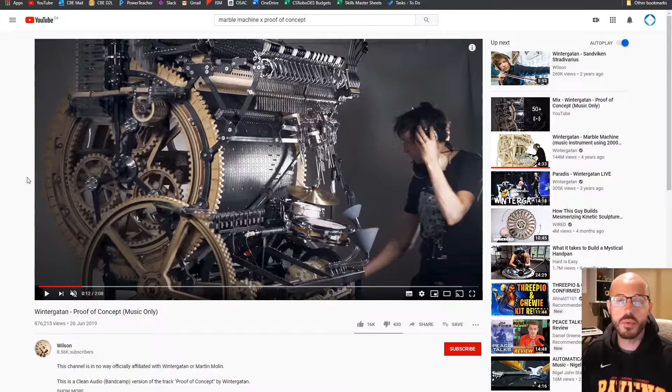So I actually got a part assigned to me a couple weeks ago. It is this part here, which is these tracks as the marbles come out. So they hit the vibraphone, they go into this funnel, they go through a tube, and then they come out here, and then they roll together and end up merging with all the other marbles from various parts of the machine back into the loop that takes them up to the top.

So this part, as well as this bracket, was my assignment. I actually had the original models from Martin, so it was just kind of tidying that up. And then in terms of modeling it on the actual machine, this is a piece of plywood, but it's kind of warped and bent. So I just kind of had to do a quick and dirty bend to this whole thing to make sure that it lined up with the other parts.

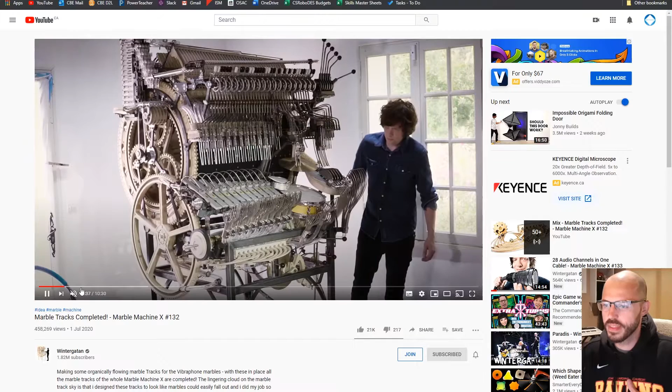Not too hard. I'm not going to show you that, because as soon as I submitted it, basically the next day, Martin uploaded this video that I have open here. And it's basically just, hey, I'm chopping off this piece and here's the replacement. So my task continues. And so this is the new part, the new version. Very beautiful. Like, look at these marbles rolling. And they kind of speed up as they go in. Very interesting part. So I have to remodel this.

Luckily, I get to keep this bracket, but I'll still show you how that came together. Then we've got these parts here, which is actually fairly straightforward because I have the original files from Martin. There's another bracket under here that I have to model. That's a big chunk of the work, and that's what I'm going to focus on today.

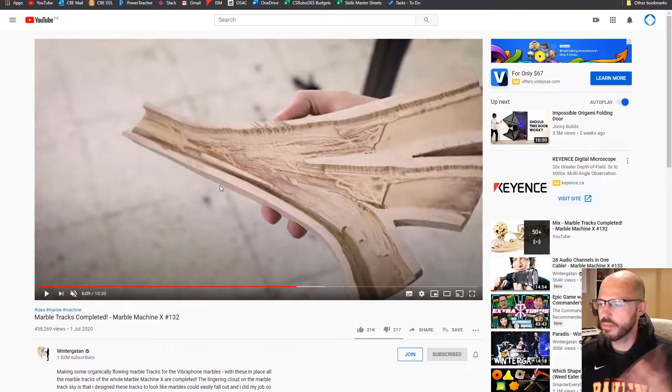And then the last thing that I won't get to today, but maybe in a future video, is this piece here where those tracks come together. And this is not modeled in CAD anywhere. Martin cut this just freehand with everything in place to make it fit. So I'm going to have to approximate this as best I can based on this screenshot basically and the other geometry that I have. But I'll save that for a future video, or I'll just show it to you later.

Now, I have a strong suspicion that I'm going to have to redo this again. No shade to Martin, and I've seen other people talk about this problem. So these are very thin pieces of plywood. And if you watch the video, Martin takes a lot of care to bend them and secure them in just the right way so that he gets this exact kind of motion that he's wanting, where they kind of come out slow and then they speed up as they come around the corner.

Now, as this goes on the road on a world tour, these bits of plywood are going to warp and bend with humidity changes. And so that's going to throw all of that fine calibration out the window. My expectation is that I'm going to be redoing this part at some point, but we'll cross that bridge when we get there. And for now, let's have some fun. I thought it would be an interesting thing for those of you that are learning Fusion 360 to see how I approach this challenge here.

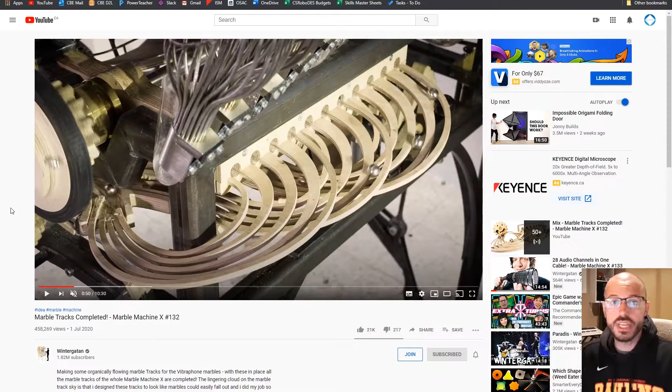So to kick things off, we'll just hop over into Fusion here. This is actually the file from Martin that I got. So you can see here are those curved pieces of plywood. And then what he did, he modeled these in 3D with these curves to fit the actual assembly, and then took the top plane of these and made that into a 2D shape so that they could be cut out on the CNC out of plywood.

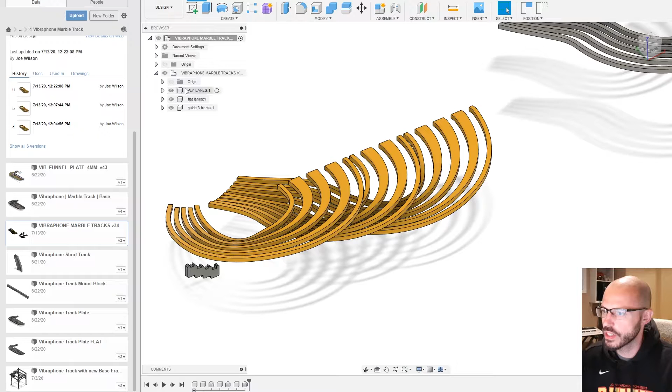So really all I care about are these things, which it looks like, okay, so they're a separate component. So I think what I'm going to do here is I'm just going to export this component. I'll save a copy as. I'll just call this VibTracksREDO. And now I've opened that up.

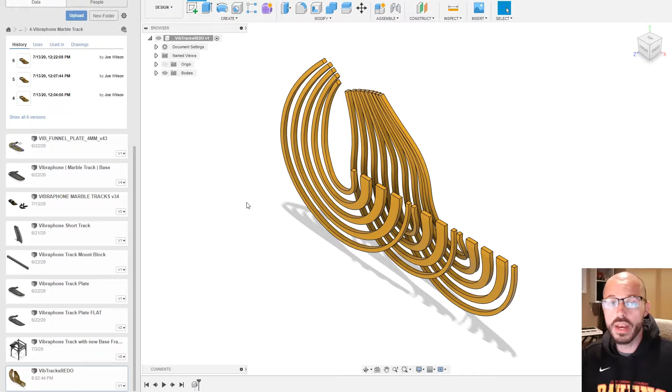So one thing that we've talked about a lot in Fusion 360 is this idea of rule 1 of creating empty assemblies or empty components and building each individual part as its own component. For this de-featured version of the Marble Machine X, part of the CAD guidelines, the standards that our team has put together, is kind of the opposite of that. Anything that is its own part, so in this case, these tracks along with that bracket that they attach to and the thing that collects them all, that's just going to be a single component made up of just bodies.

So these bodies aren't going to be individual components. So this is a fine place to start, given that I just have these bodies. So that's great. So one thing that we're also doing is trying as best we can to have every part use the same origin. So here is the current version of the base assembly that my marble tracks are a part of. And so they're going to attach right in here.

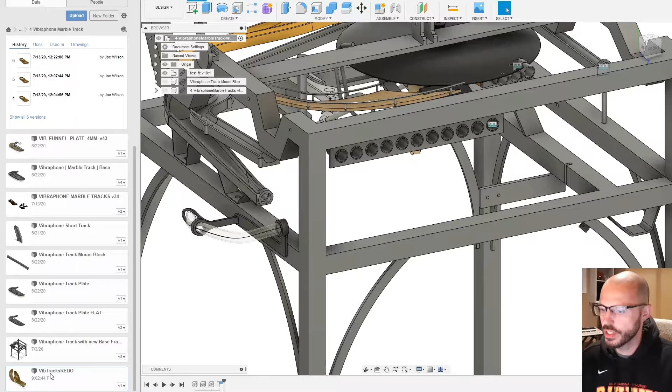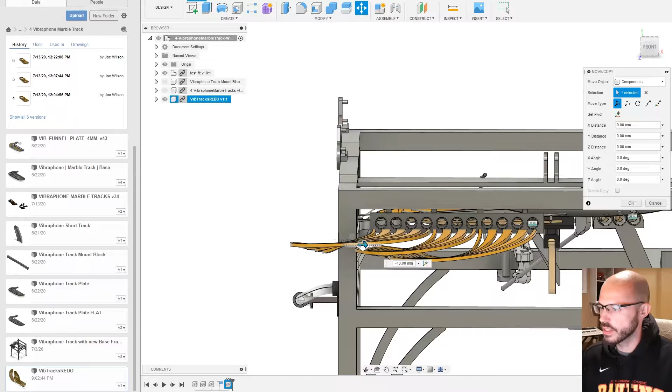So the thing I'm going to do is I'm going to insert this in, try and just kind of roughly line it up and see what's going to need to happen. I'm just placing this really roughly just to kind of get a sense. So when I start the next part of this, I know that this is like at least kind of in the right spot. So when I move this here, we can see the origin for this part, that's this one, is way over here. And what I would like is for this origin to be down here.

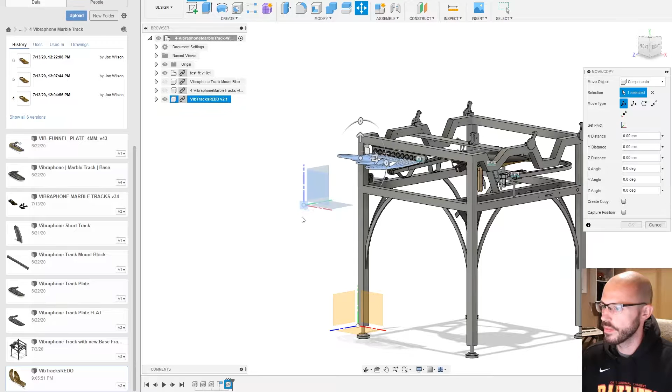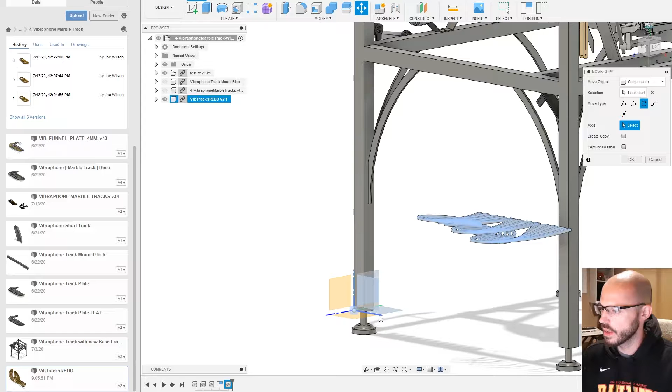So actually what I'm going to do is I'm going to move this whole component. We'll do a point to point, and we'll move that origin down to there. Now, the other thing is that the origin of this is rotated from the origin of this base model. So I should actually rotate this whole component over this axis 90 degrees to get that in line. So that's if the origins are lined up and now the part is not lined up.

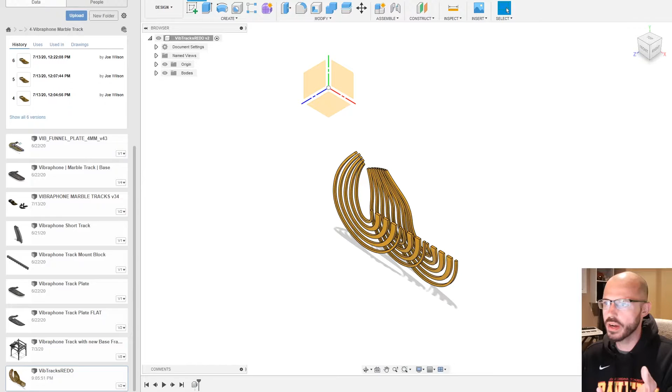So what I'm going to need to do is edit this part so that it is in a different place relative to its own origin. So I could go back and do that in here, but I wouldn't know where to move it. What I can do in here is I can say edit in place, and we'll capture that position. And now I can move bodies. I want to move all of them, and we'll just do free move here. We're just kind of roughly getting it into place. So now I'm moving this relative to its own origin.

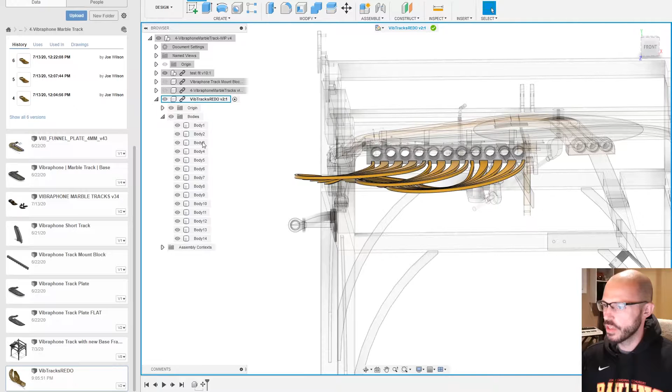This is so that when other people are loading these models into an assembly, they are already going to show up in the right place. And they don't need to track down exactly how they align. So then what I can do is I could check this, finish edit in place, save this, okay.

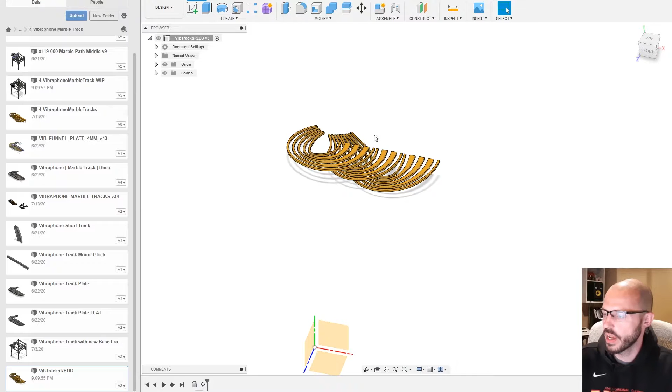And once that's done saving, I'm going to flip back to the other file. And we can see that it's got an out of date warning. So I'm actually just going to close it and open it up again. So now we can see the origin is down there. We've got our part here. And the next step is going to be working on that bracket. And I'm just going to flip to the video and show you exactly what I'm talking about here.

And it's this piece here that is going to take a little bit of work to model, and I'm going to have to make some assumptions, but I'm also going to base some things off of measurements from the actual model as it exists now. I don't think any of the assumptions I'm going to be making are really critical measurements. If I needed to, I could submit a request to Martin to take a measurement off the machine, but I don't think that's important. Unfortunately, I don't have the CAD model for this, which is odd.

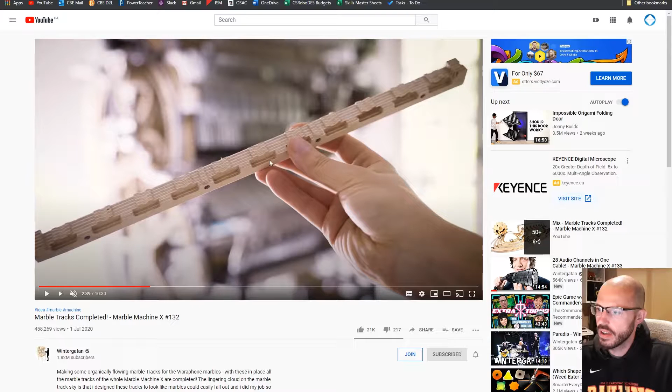So, I mean, it's possible he just did this by hand on his CNC, just because it's just a repetitive geometry. I'm not sure. But what we can do is model this to the best of our ability. So this piece here fits onto the assembly here on this metal bracket. So it's the underside, and then there's a top bracket that I already have from the last time, a top half of this. And so those two together kind of sandwich the track pieces. So you can see there's that part there.

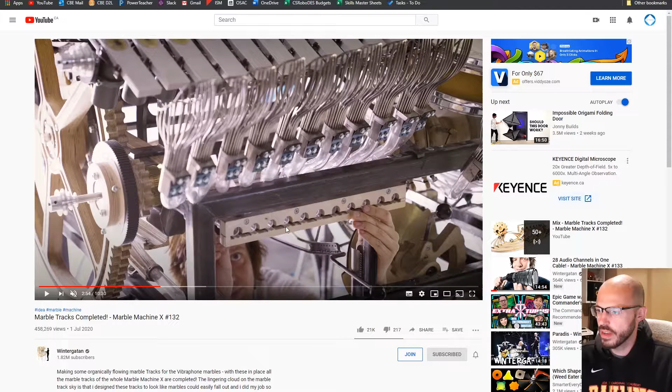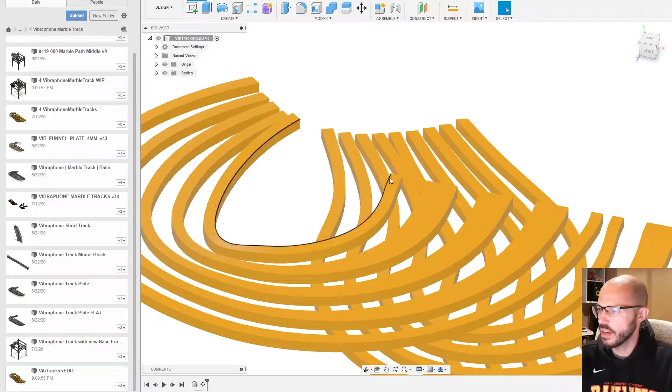So we've got these 11 rails for the marbles as they come out. Although I don't even know if they contact these because the curved rails are above them. These notches in the back are to clear these, and then there's some kind of posts here just to help with spacing, because some of the tracks are thin on the end and some are thick. And so here, where we've got two thin ones side by side, there needs to be a spacer. And so that's that piece. The way that I start with something like this is just on pen and paper.

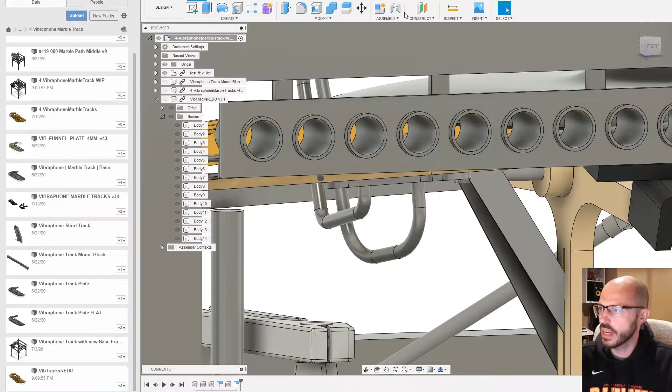Okay, that's right here. Another thing I could figure out was the height of this part, because the other part of the bracket I already had modeled, and I know the total height of that metal bracket. So that's pretty straightforward. Then some things I could figure out based on the parts that I did have are, for example, this width here: all of the short ones are 7 mil, and all of the long ones are 19.8 mil. So that tells me that this is 7 mil, and this I actually just rounded up to 20. Again, these aren't critical dimensions.

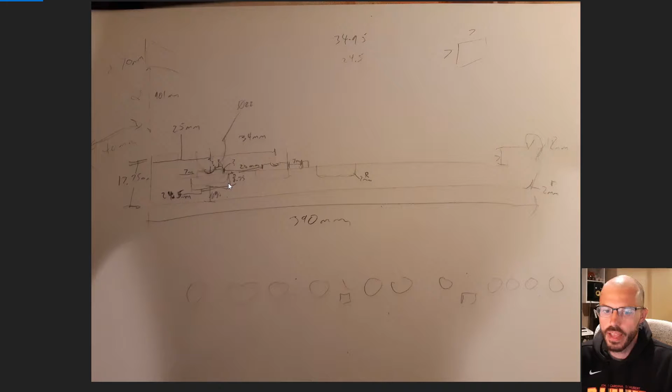Here, this cutout, this depth is based on, again, what we know about this part here. So the other bracket comes to about here. So we could measure how much further down we needed to get to clear this. And then in looking at the actual part, I think he went a little bit lower just to make sure there was good clearance. So I just ended up eyeballing that. But this is a place to start, just a rough sketch and starting to flesh out some dimensions. And then other dimensions got added to this sketch as we went, as note keeping.

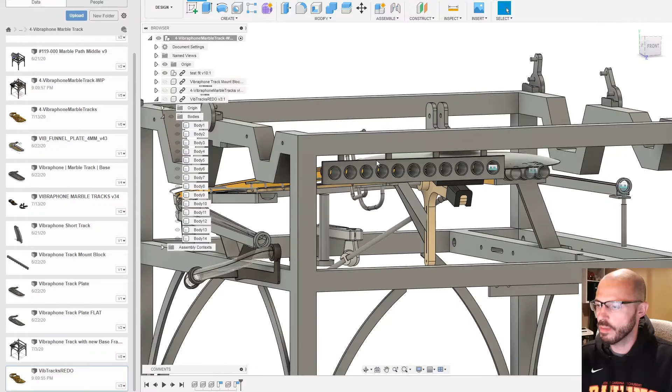But another really important thing I needed to know was, where does this bracket live in relation to the origin on the model? And that again came from this version of the model. I can simply measure from, for example, this plane to this plane, and that tells me 70 mils. So that means that's where the part needs to start, 70 mils off of that plane, and I could do that for the other two planes. So in my sketch, that's this. I just know that it's 70 mils this way, 40 mils this way, and 901 mils up. That's the starting point. So we can go in and start making that happen in here.

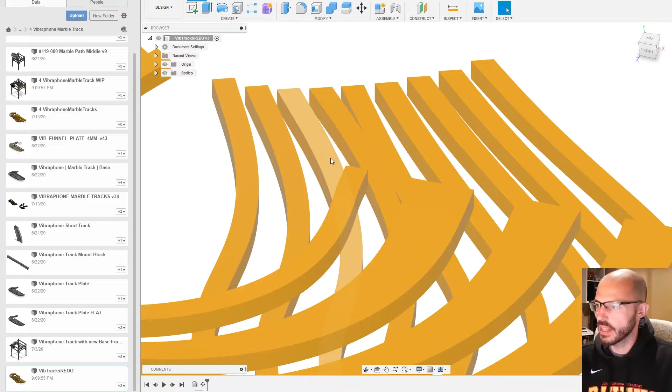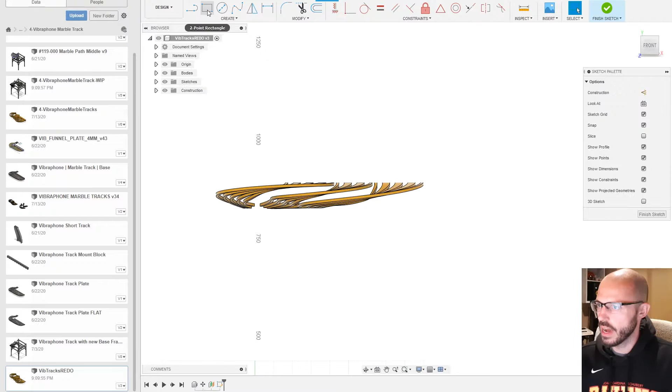It is back from the origin by 40 mils off of this axis. So I'm going to go ahead and make a new plane to work from that is negative 40 mils back here. And this is where the sketch is going to go. Now I'm just going to rough in this rectangle here. It's kind of here, but exactly where we will define with dimensions. Okay, so let's do that.

Dimension this wall to this plane, which is sometimes a little tricky for Fusion to know that I want to select. There. Okay, that's that 70 mils that we just measured. And this bottom to here is that 901 mils. And for now, I'm going to just turn off these bodies so that they're out of the way.

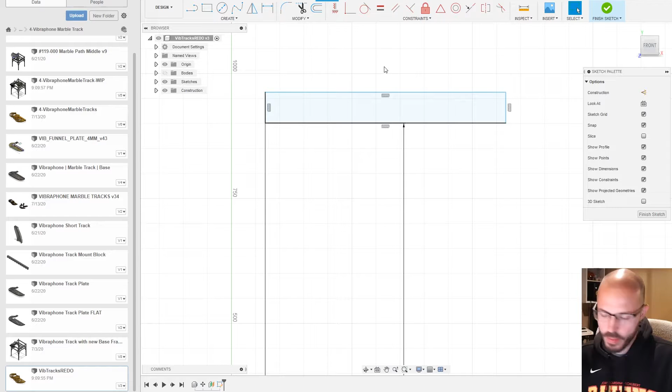Another rule we have in the CAD guidelines is that all of our sketches need to be fully constrained. That means everything is black, no blue lines. A blue line means that something is not constrained; something still has some freedom of motion. So clearly I'm missing the width and the height of this rectangle, which I do know: this to be 17.75, this to be 390. So there's our rectangle. That's the outer shape of this part.

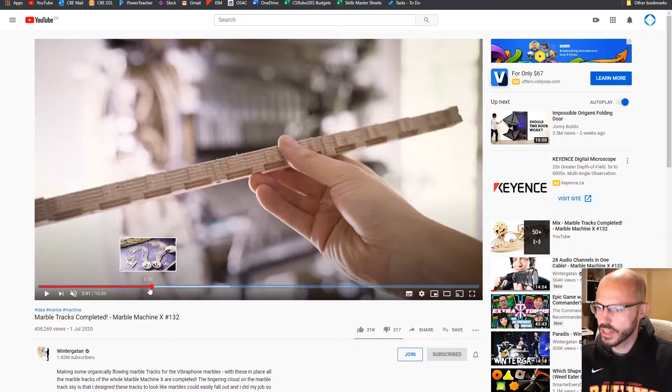So now let's start making this geometry here. So I'll just pull up my sketch again. So some things I'm going to need to do. We have this rectangle cut out here. We actually don't know this width, but it will be dictated by other parts of this geometry. We know that there's a 7 mil gap, and then we have this rail that rises up and then comes down. Exactly how wide that is, I think we can calculate. We'll figure that out in a second.

There's this arc in here. We don't know the radius. We don't know how deep into it it is. We're just going to eyeball it, I think. And then there is this other notch cut out for the clearance. And we do know how deep it needs to be at minimum, but we'll eyeball that.

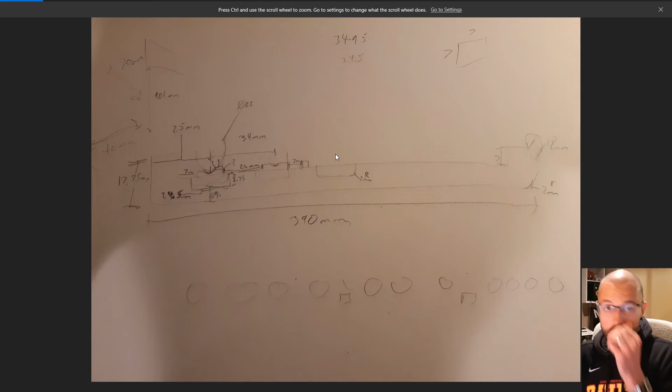And we can also figure out how wide it needs to be, again, at minimum. And then this feature is just copied 11 times down the way, so we don't need to model that every time. We'll use the rectangular pattern tool right within the sketch.

Another best practice that we have is trying to do everything as much as we can in a single sketch, just to minimize the number of timeline features that need to be loaded in. So we're going to put all of this geometry in a single sketch and then do all of our extrudes off of that one sketch. So let's get started here.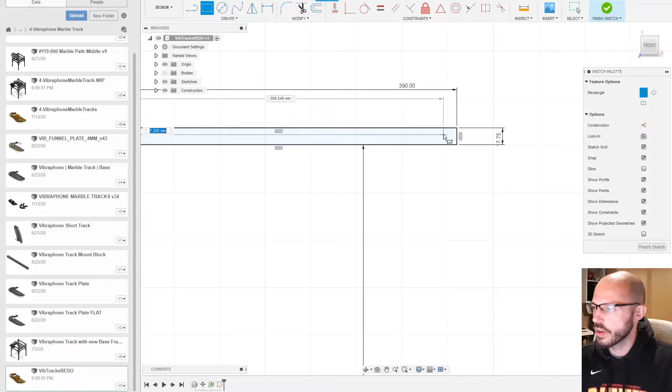First thing I know is that there is a rectangle that kind of goes the whole way. And we don't know the width of that yet, but that's okay. Then we have a rectangle up. It's got an arc in it. We'll deal with that in a sec. We also have a rectangle down. Now these two rectangles are supposed to be stacked on each other.

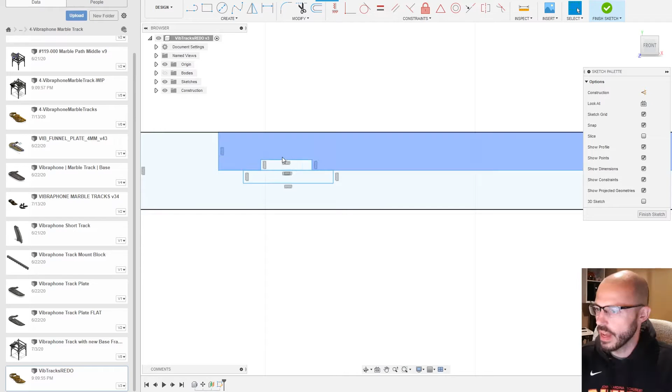I think probably the easiest thing to do for this is place a construction line, because I'm going to need this center for a few other things as well. And then what we can say is that the midpoint of this needs to be on that line. Now, if I move this, I can move this whole thing around, that's fine so far. And then I can play around with these things. So what do I know?

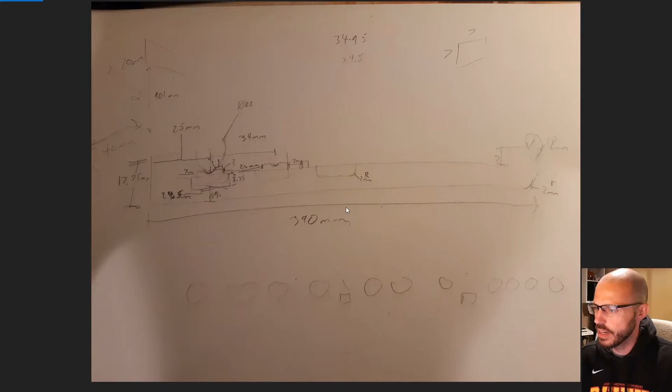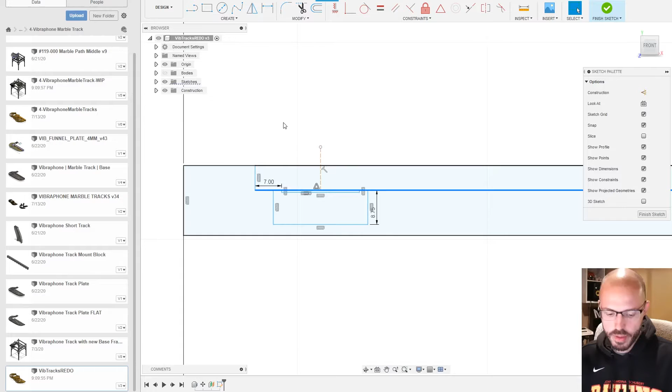Back from here, I know that this gap here needs to be 7 mil to fit the 7 mil track. I also know this depth here is going to be 8.75. That is certainly not right. Oh, it might be right. We haven't gotten this depth down yet. What does this depth need to be? Well, actually, we know that the tracks themselves are 7 mil thick as well as 7 mil wide on the short ones. So we can dimension from this top line to this bottom 7.

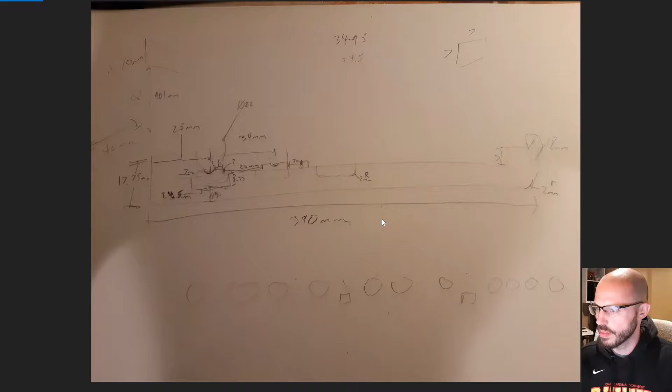I suspect it's not that deep though. Yeah, I think my drawing has this from the wrong spot. That's 8.75 from the top here. I think it's certainly deeper than that, but we'll fine tune that later. And in fact, because we're not 100% certain about this measurement, and we're probably gonna wanna change it later, I'm actually gonna make this a parameter.

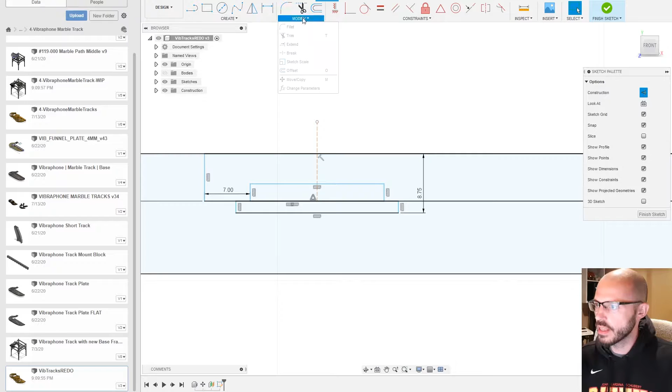So if you haven't seen parameters yet, this is one of the most useful things to know. It's basically a way to assign a number to a name, and then you can use that name anywhere as a dimension, and then you can just go change that parameter here in this menu, and that change will propagate through everything else that is using that parameter as a dimension. You'll see what I mean in a sec.

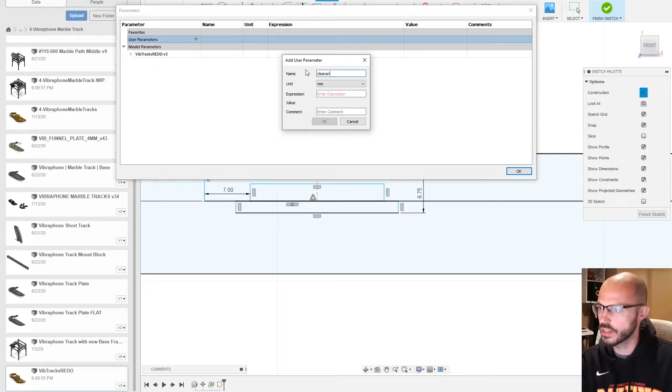We will call this, what is this? This is like the clearance height, and I'm just going to call it 9 for now because I think it's probably closer to 9. So here in this dimension, instead of putting in the number 9, I can put in clearance height, and that will just set it to 9. What else can we figure out?

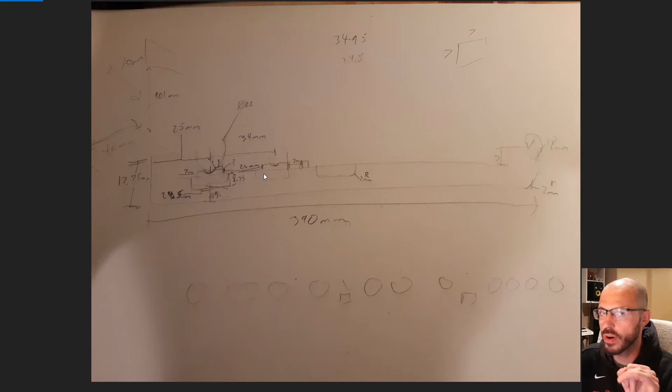So we know that the spacing between each of these rails is 34 mils. So that's 34 between the centers of them. It's also 34 between the edge, like this left edge and this left edge. So if we know that from here to here is 34, and we know there has to be a 20 mil gap in between for the rail to fit, that leaves 14 mil left over for this block here. So we know that from here to here, 14 mil.

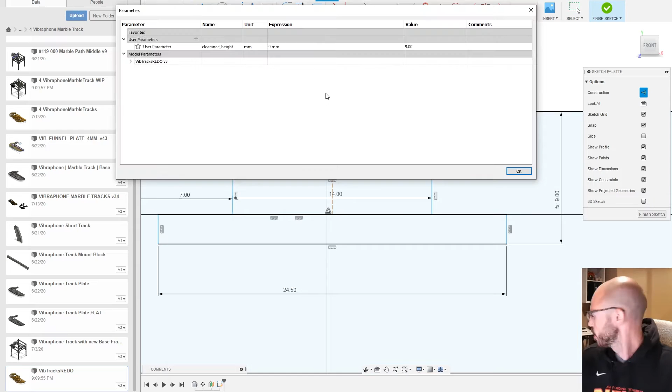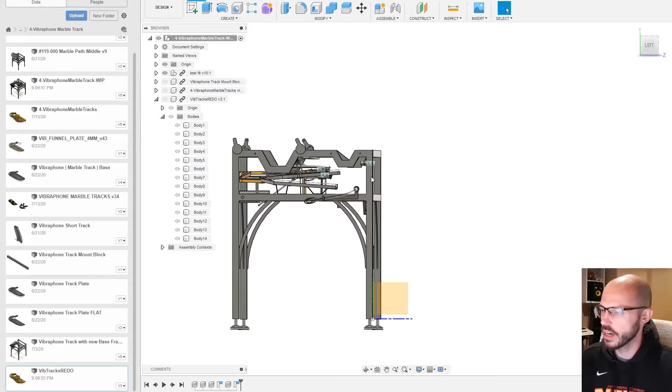What we don't know is the height of this. So we'll make another parameter here, and we'll call this rail height. To start off with, I think like 1.5 mils, it's pretty small. Okay, it's still not fully defined, obviously, because this can move around so much. How we're going to figure that out is probably by measuring the distance from this plane to the middle of this hole.

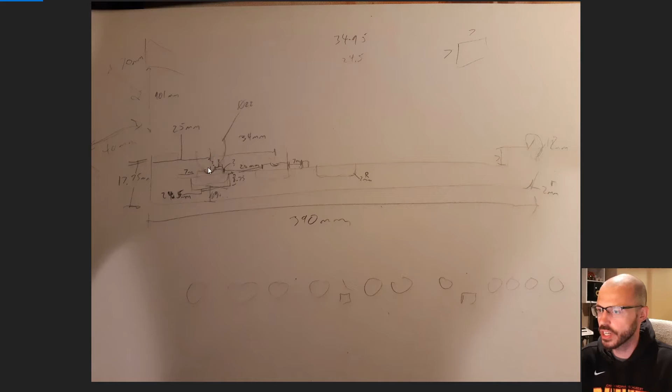And we get the minimum, the max, and just the distance to the middle, which is 25. That's the one we're after. We can see it if I highlight it here. So that tells us that from this edge to the center of this geometry, which we have that handy construction line, that's 25 mil. So we can go put that in the sketch as well. From here to this line, 25. So now all that geometry is nice and locked in, which is excellent.

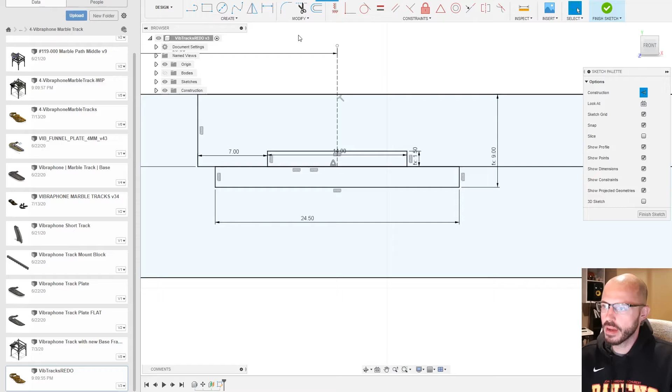We just need this arc as well. Something I suspect is that it's the same radius as the tube that comes in. So inside this metal bracket, there's actually a plastic tube, and the inner diameter of that tube is 18 mil. So I suspect that the little rail actually kind of sits right here and has that 18 mil. So I'm just going to go ahead and use that and not worry too much if I'm 100% correct.

So we'll actually just move this down manually, and we'll worry about locking it in later. For now, I'm actually just going to lock it in place. So now we have that.

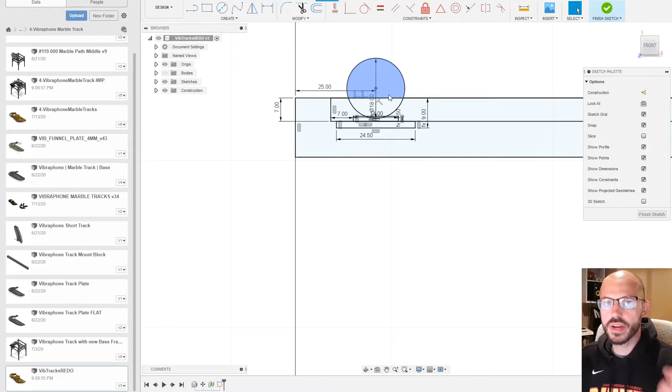We could do the extrudes and then use the rectangular pattern tool to make a rectangular pattern of extrudes, but it's easier on the computer, on the processor, to just copy this geometry over in the sketch and then do a single extrude for all of them.

So let's do that. We will create a rectangular pattern and select all the geometry that we want to copy over 11 times. I'm just going to get the stuff that we actually care about. I don't need this bottom line here. We're going this way. We want to make 11 of them. We know the spacing, and that spacing is 34 mil.

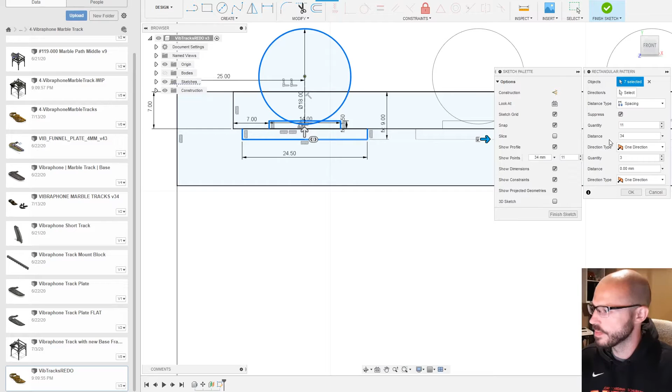Boom. And so there we go. We have that all the way to the end. And very last thing is this final wall here. It doesn't know where it's supposed to be, but we know that it needs to be 7 mil from that.

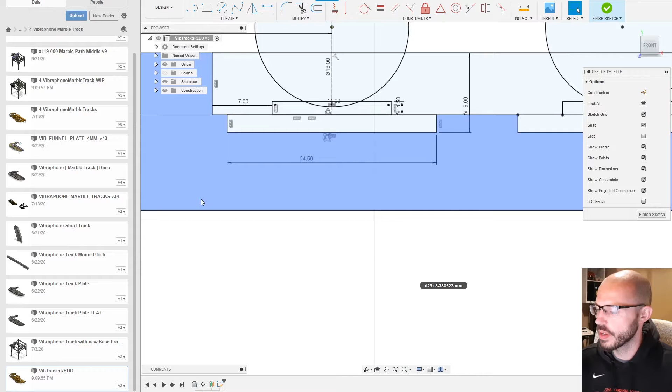Done. Now, a couple things I'm thinking about here as I'm going. This is not the correct number. I remember now, it's actually quite a bit less. It's actually 20.5. I think that was a miswriting there.

And you see as I do that, because these other parts are based on that, I'll undo and redo it. And you can see they all update, which is a great reason to use rectangular pattern.

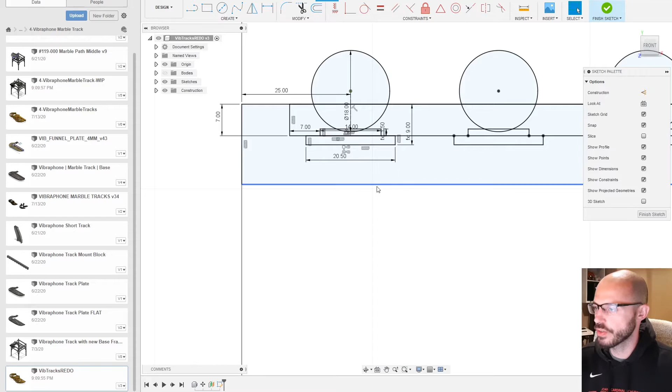A few other things we need to add in the actual part itself. We can see if we look really closely, there is a fillet to these corners, as well as these inside corners here, to round it out.

So the outside corner fillets, I am just assuming are the same as the metal bracket in the assembly that we're basing on, which is 2 mil. These inner ones, we're just going to kind of eyeball. Again, it's not a critical dimension, so we're not going to worry too much about it.

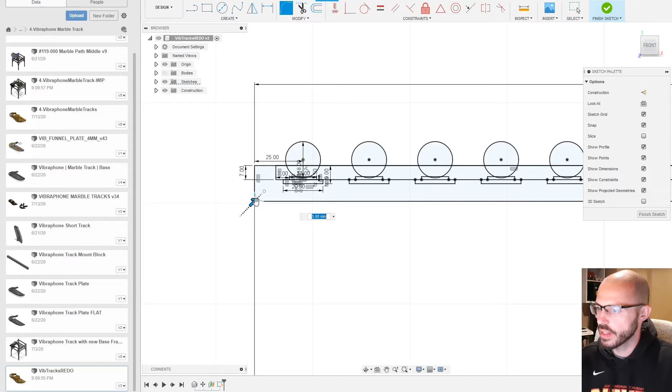So we will add a fillet here, and it's also over here, and that is a 2 mil fillet. And we will also add a fillet here and here, and we will make that perhaps a 1 mil fillet.

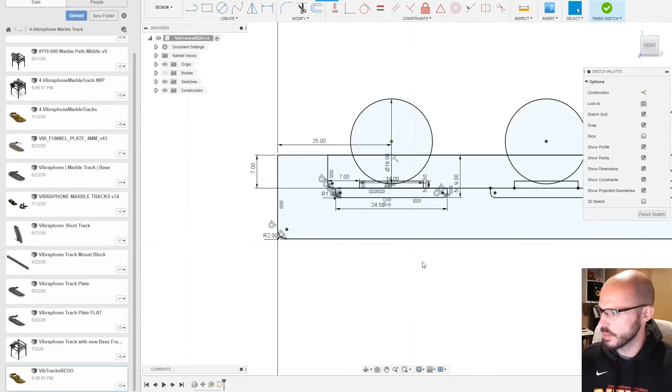Now we can see something has gone up with our stuff, and I think that is because when I added those fillets, it broke the rectangular pattern. So I just undid and put the fillet in before making the pattern, and now everything is nice, and all we have to do still is constrain this to here, 7 mil.

Boom. So there's that sketch done. So let's go ahead and extrude so we can finish the sketch. Notice how nice and clean our timeline is so far.

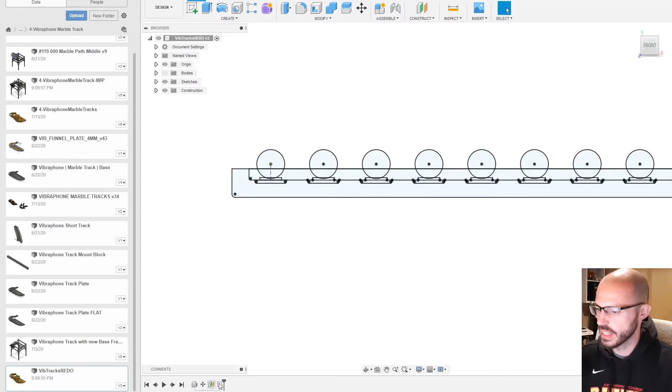Let's turn back on our bodies just so we have a sense of what we're doing here. So we need to come out this way. And how far are we coming out? This thickness, this is 18 mil plywood. So we're going to come out 18 mil, and then we'll do this cut separately.

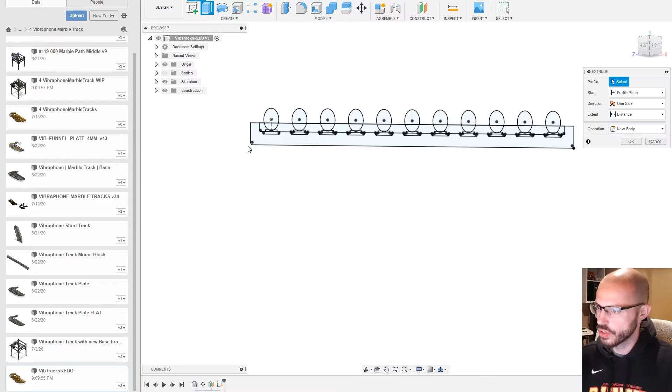So we're going to go ahead and extrude all of this geometry here and here. 18. It's not visible because I've turned the bodies off. And so there it is.

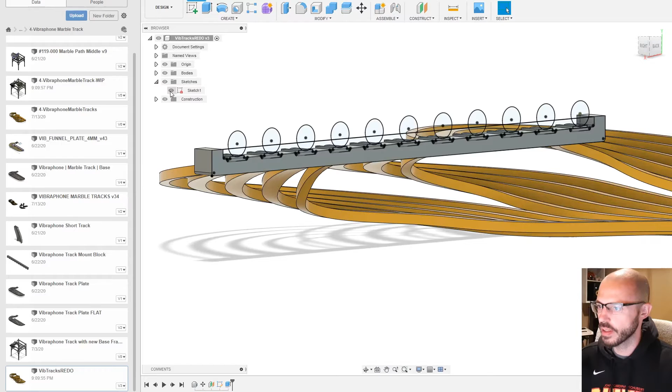And then last thing we need to do for this piece of it is turn back on that sketch. We need to cut out this clearance in the back. Let's just take a look at that here. So that's cutting into both this rail and just the main body as well.

One thing I'm just noticing now, I'm remembering I've forgotten about these rectangles. So we'll grab those in a sec. First, let's just do this quick extrude here.

Okay, we gotta go back 4 mils as a cut. Boom. I know that's 4 mils just from the other part. This sticks out 4 mils.

Okay, so let's go in and add those spacers. And the best way to do this, again, we're not gonna make a new sketch. We'll just edit our old sketch, get rid of these bodies. Actually, we'll use the bodies here to tell us where the spacer goes, here and here.

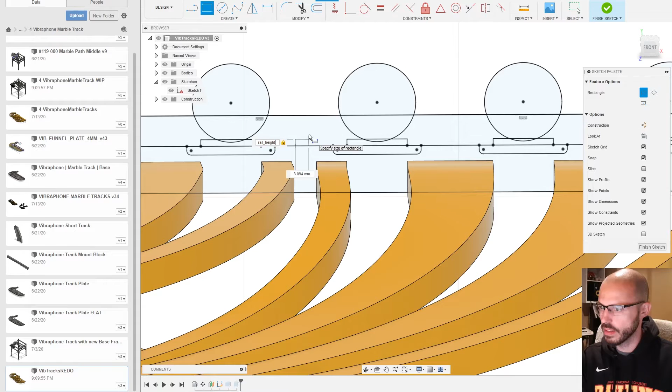Okay, so it's a rectangle. It's gonna be the same height as these rails. We don't exactly know the width, but we do know that from here to here has to fit one of those rails, and same thing on this side. 7. And we could rectangular pattern if we wanted to be really fancy, but that seems silly.

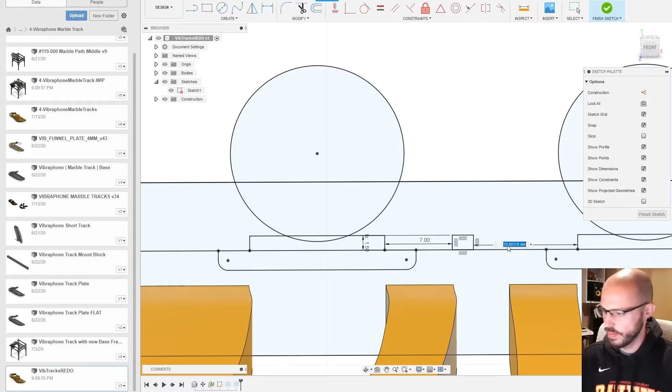Okay, finish that sketch. Go back to this original extrude and just include these rectangles in.

Boom, okay, look at that, timeline's still clean and it's all there. Let's hide that sketch. Okay, so that's looking pretty good.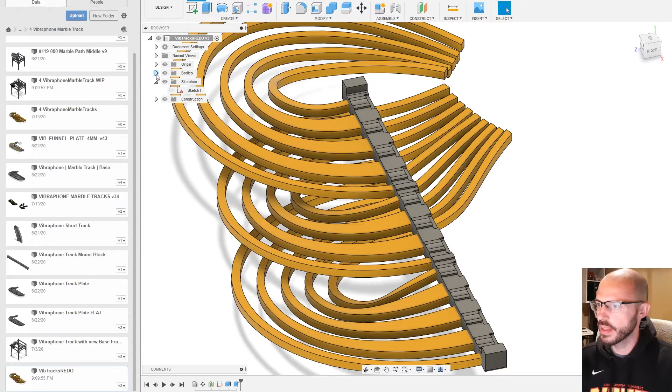Next step, let's get these other bodies and move them up to where they're actually supposed to be. We'll select all of these and scooch it up. I'm just going to move it up first to see where it is, and then use point to point to put it right in place.

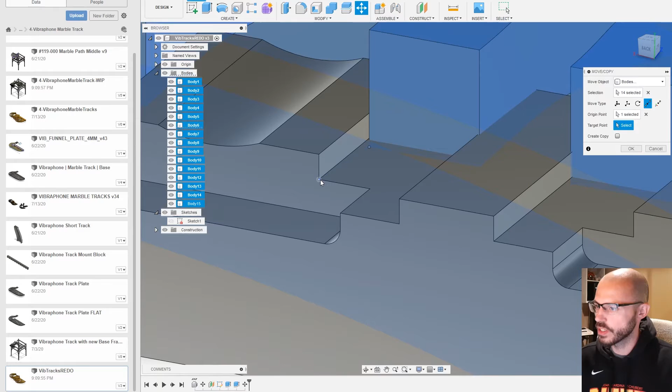And then you'll see some limitations of this. I have to hide this so I can grab this point and scooch it right into here. Boom, okay, now some issues with this model.

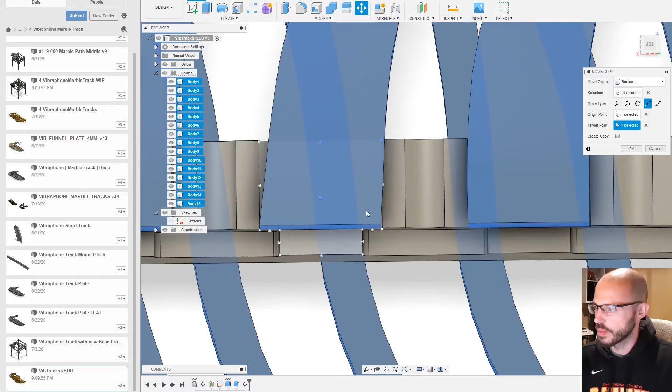Obviously there's some weirdness just because of the way that Martin modeled these, but these are plywood pieces, so they're pliable. We're not really concerned that this piece is kind of clipping here, it's not going to be a big deal, but at least we know they're in roughly the right location, so we know the ends are in basically the right location.

The last thing I'd need to do is add this upper block that goes on top and sandwiches them in. I have it modeled from previously. However, I want to keep this to just be a bunch of bodies inside of a component, and if I import this in, it's going to be a separate component.

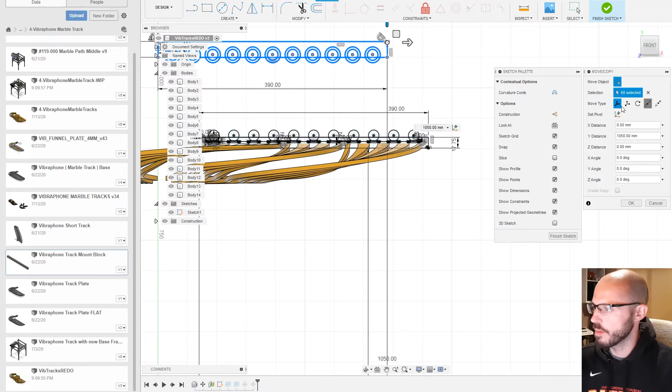So the kind of hacky way of doing this is going to be to go into this file. This is the sketch that defines it. I'm just going to copy all of that, go back into here, into my original sketch, paste. Where did it go? It's down here, bring it up. I can point to point this to here.

We can see it's still blue, that's just because it hasn't been constrained. I'm just going to tell it you are locked into there. Boom, okay. Okay, it's a little awkward that our circles are not even.

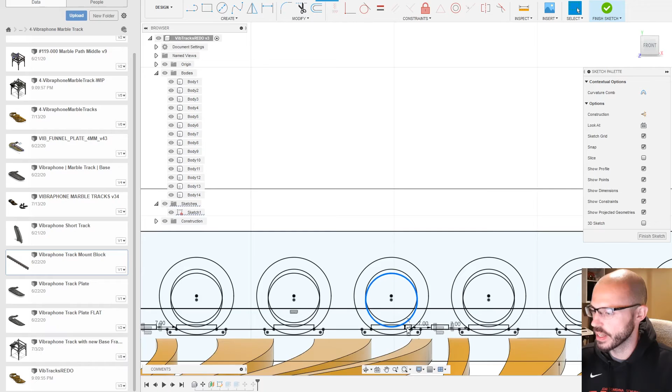This circle again was just kind of arbitrarily placed to get that little arc there, and we could change that if we needed to. But let's finish this sketch.

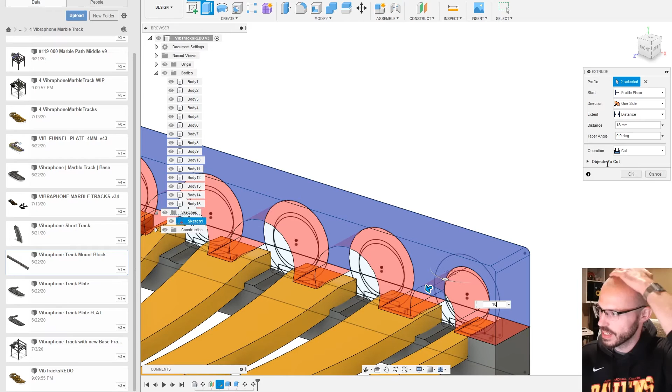We'll have to do this as a separate extrude, and we need to bring out this and this all the way, 18. It's going to think we're trying to cut because it's going to sense that it sees those, but we actually just want a new body. And I'm just noticing that I forgot to bring out these. Oh, did I get myself into trouble by having these circles?

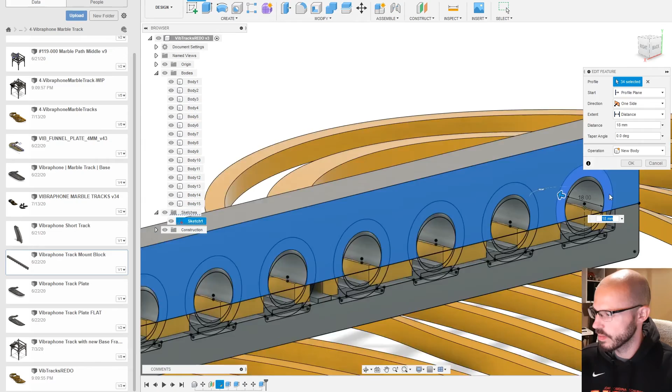Four mils in, it knows to do the cut. There we go. Turn off the sketch so it's not so ugly. And there we have what it looks like on the back side.

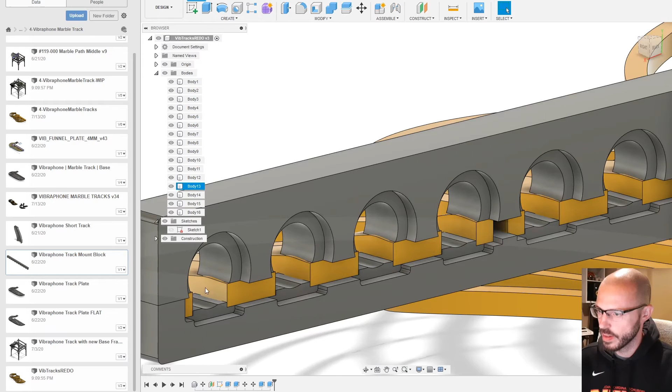One thing we'll notice here, ooh, look at that. See, that's that outer rim of that pipe, and that's where this clearance is coming in. So that's good, it does in fact clear that.

You might be thinking, ooh, this looks bad that it's kind of clipping into here. But remember, inside of that pipe is that tube, the PMMA tube, which is a little bit tighter diameter, so these edges don't actually clip. And if they do, I'm sure Martin sands it down. So whatever, okay, so we can save this.

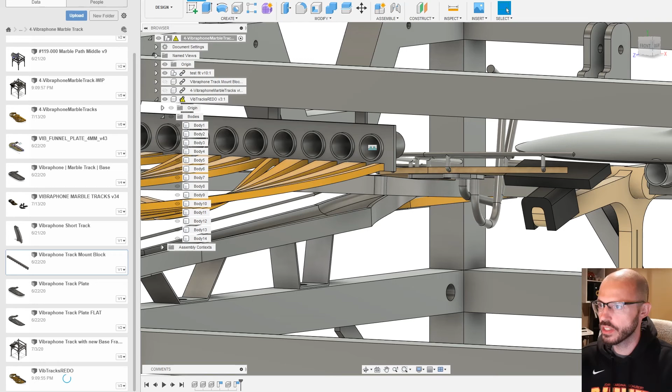And just to double check everything, we'll hop back into here. We can see that it is not up to date, so we will click Get It Up to Date, please. And all those changes propagated in, perfect. And there is our part so far: 1, 2, 3 bodies, and then these all swirl around.

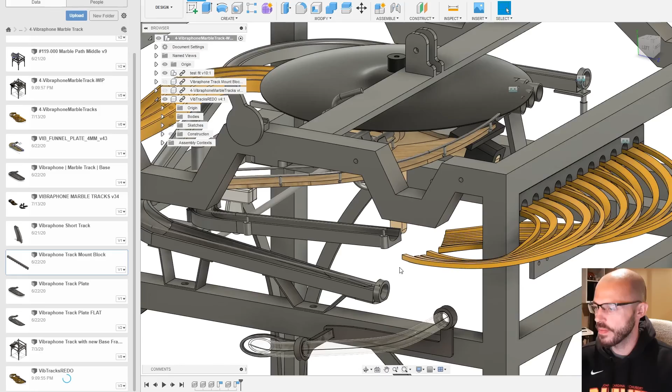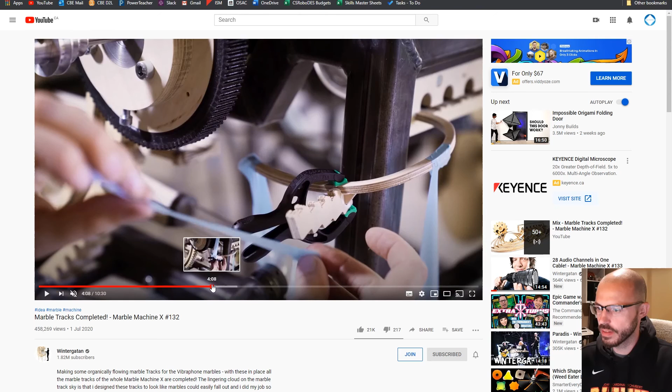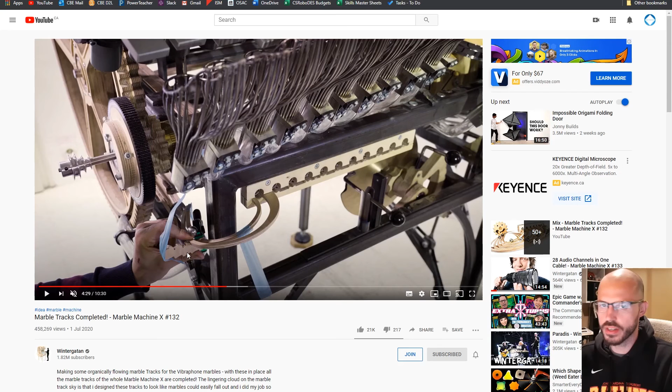So still to do, I obviously need to make that back section, that's going to be a real pain in the butt, but we'll make it happen. There are also these little clippy things under here that you can see in the video as Martin starts assembling this, he attaches this guide clip to keep the spacing correct between them. So I'll have to model that. The model I have isn't this actual part, so I'll probably base it off of that and go from there. It also doesn't perfectly fit these parts anyway, so we'll see what we can come up with.